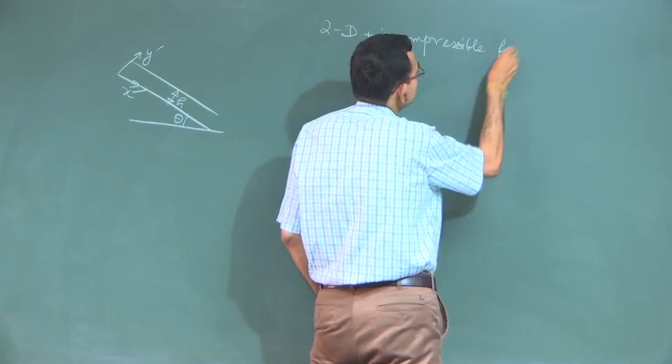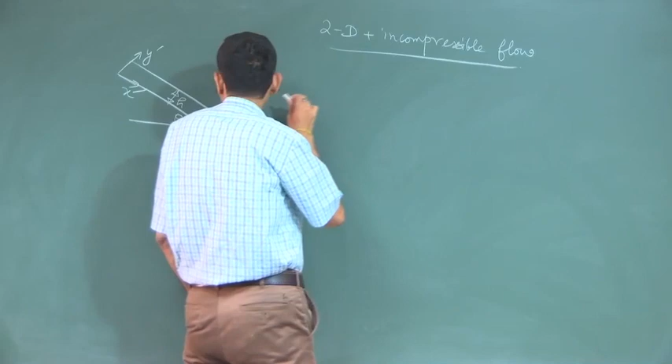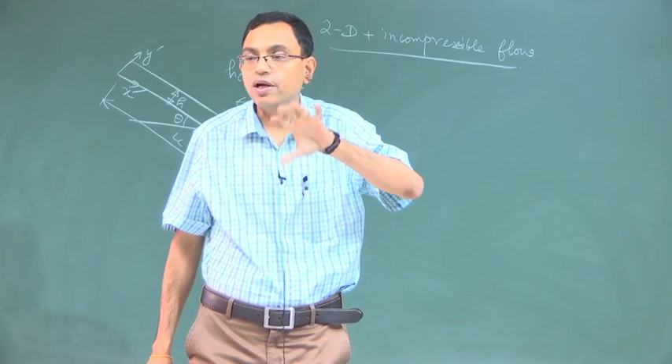What are the governing equations? After considering that the characteristic H naught is much less than LC, so that epsilon, which is H naught by LC, is much less than 1. With this consideration, and of course with the consideration that the product of epsilon square and Reynolds number is not large. So, Reynolds number is not abnormally large such that even if epsilon is small, Reynolds number into epsilon square is large. That situation we are ruling out.

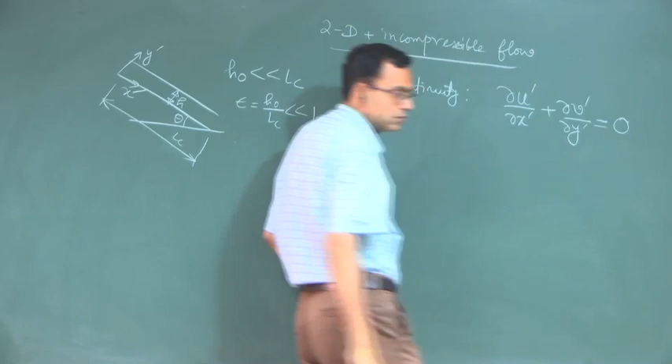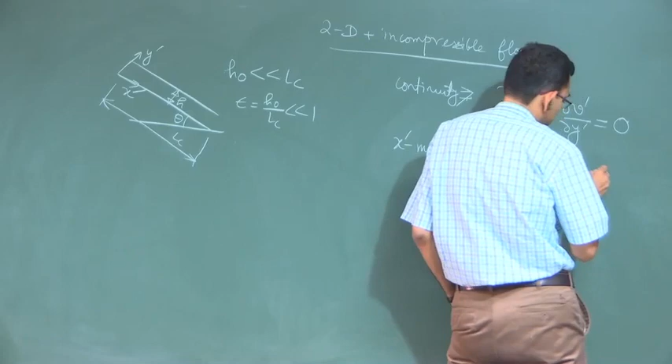Our hope is that even if the Reynolds number is moderately large, epsilon is so small that epsilon square is limitingly small and epsilon square multiplied by Reynolds number will be negligible. That is our intuitive hope. So, with that, the continuity equation will always be important. These are the momentum equations.

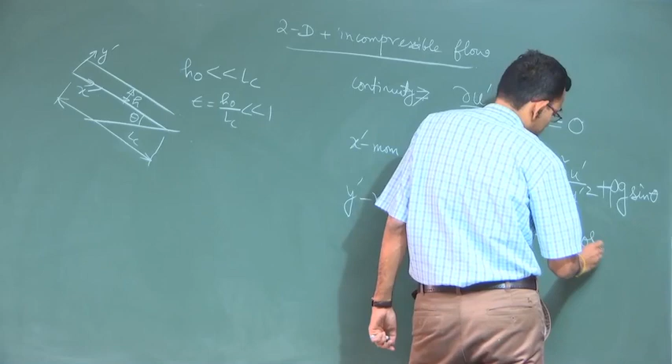So, this mu del square V term itself is not there. So, you can see a very interesting thing: along the y direction, which is across the film thickness, the pressure variation is like a hydrostatic pressure variation, purely gravity driven. Okay. So, we have given detailed considerations of how different terms are dropped so that these simplified equations are arrived at. I am not going to repeat that in this lecture anymore.

Now, we should concentrate more on what we require so that we can solve these equations. Out of these equations we really do not know U, V, P. We also do not know another thing which is hidden in this equation, because everything is expressed in terms of film thickness, but film thickness is not given to us a priori. So, H, the dimensional H, say H prime, is also not known.

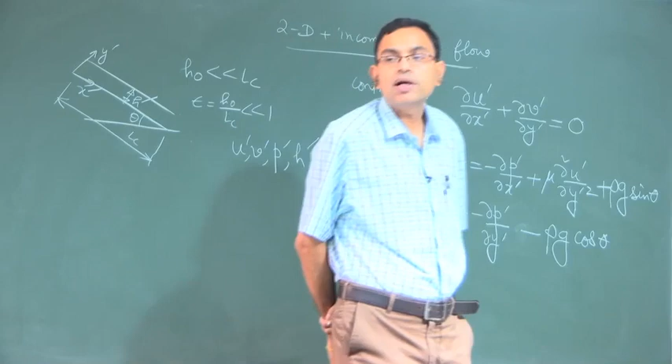The thin film problem that we discussed as a special problem in the context of exact solutions of the Navier-Stokes equation differs from the generalized thin film theory in that there this was taken as a constant, no more a variable for the problem, but now this is a variable. So, you require enough boundary conditions to solve this problem. What are the boundary conditions that you must consider?

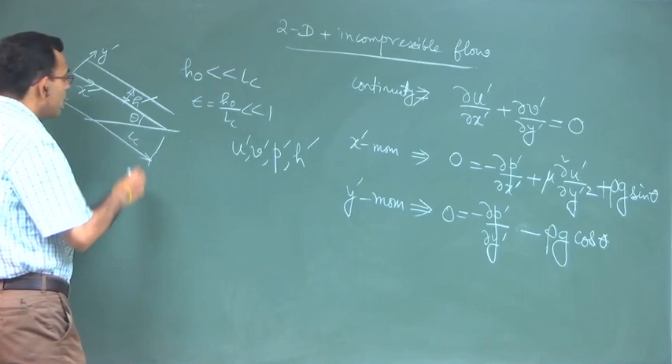First of all, we will consider the boundary conditions at the interface. To highlight that this is not flat, let us draw it like this, so that you never keep the prejudice in mind that it is flat. Under certain conditions it may be treatable as flat, but in general not. So, what are the boundary conditions at the interface? That is the first question we would like to answer.

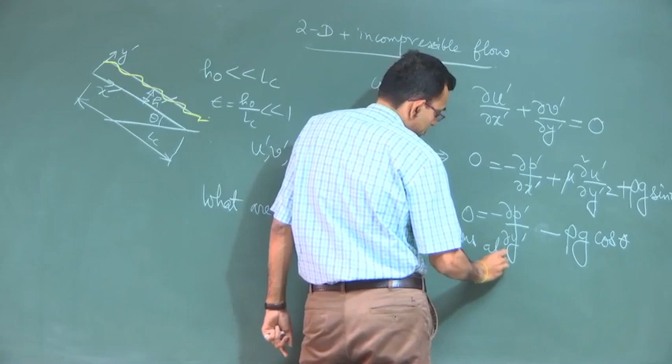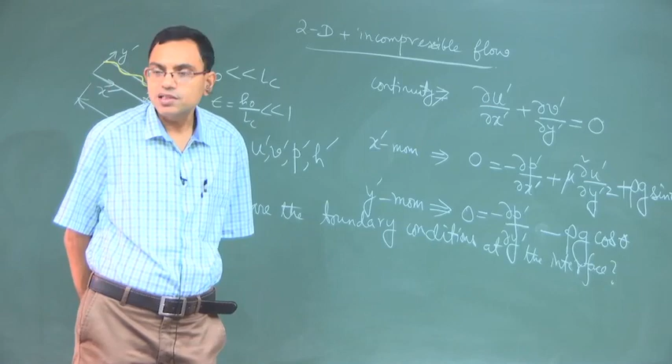The boundary conditions at the interface are typically as follows. One type refers to force balance at the interface, and therefore they are kinetic in nature. Another boundary condition purely follows from kinematic constraints, and that is called the kinematic boundary condition. We will start with the force balance boundary conditions and then arrive at the kinematic boundary condition.

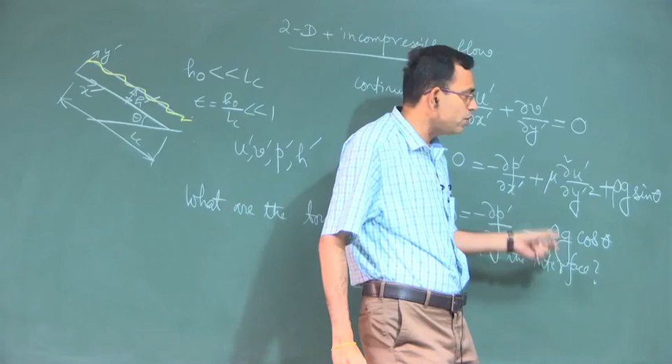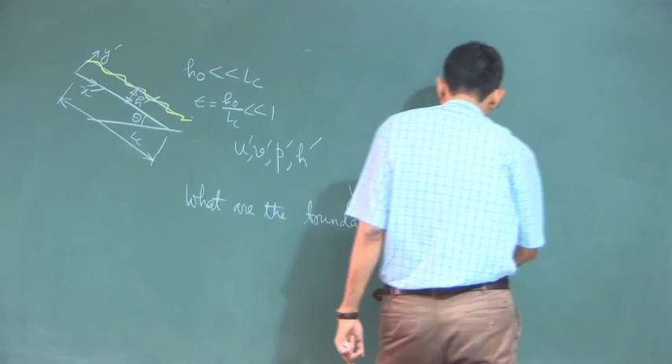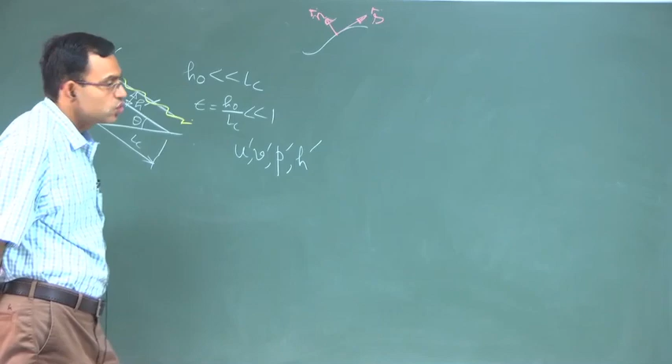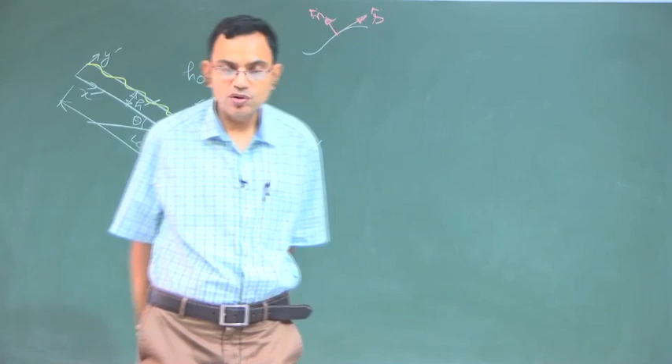I am erasing these equations; we will come back to them when we non-dimensionalize the governing equations. When you have an interface like this, the two important directions for the interface are, in terms of curvilinear coordinates, the s and n directions. We will write one force balance along the s direction and another along the n direction. Along the s direction, we call it tangential force balance.

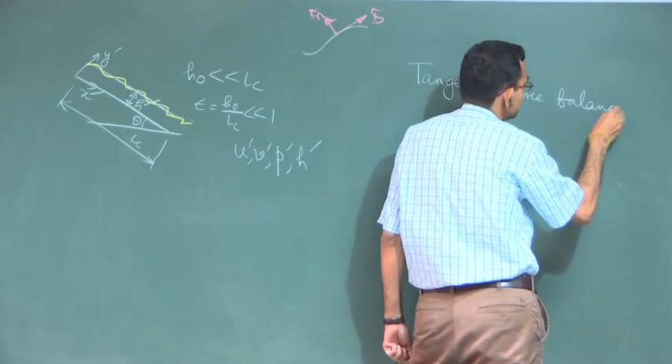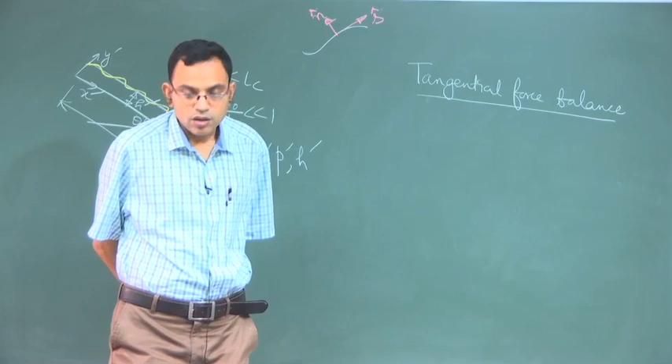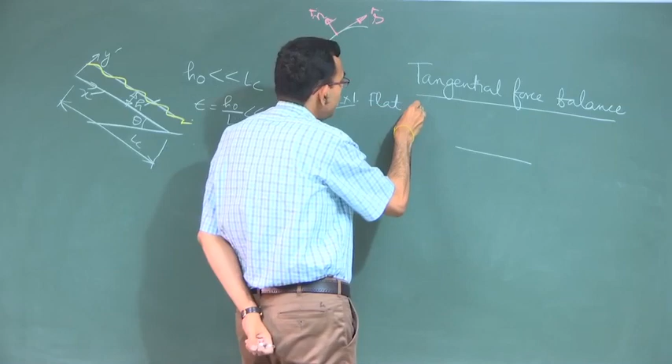So, how to write a tangential force balance boundary condition? To understand it clearly, we will consider a flat interface first. Example 1, flat interface, and then we will extend it to a curved interface. For a flat interface, let us say this is an interface. This is like an edge view of the interface. In reality, it is something like a flat membrane, so to say.

So, now let us say that we have a force balance at the interface. On this side there is gas, or I mean a phase which is having much less viscosity and density as compared to what is there on the bottom side, that is our assumption. So, if that be the case, we are not really bothered about what is there on the top side, and on the bottom side there is some liquid.

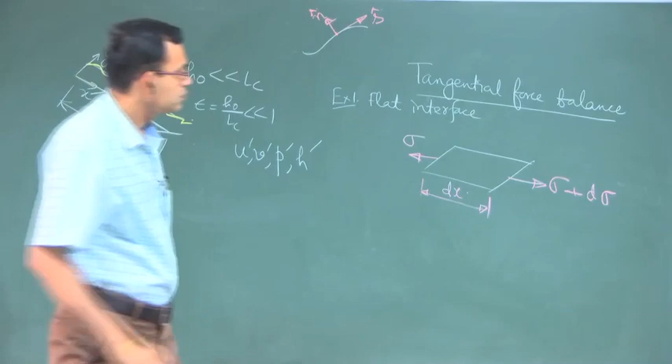So, now at the interface there can be a variation of temperature along the tangential direction. If there is a variation of temperature or composition along the tangential direction, there will be a variation in the surface tension force, because surface tension is a strong function of temperature and composition. So, if the surface tension here is sigma, and if this length is dx, here this is sigma plus d sigma. Let us say the width is 1, this dimension is 1. So, sigma into 1, this is sigma plus d sigma into 1.

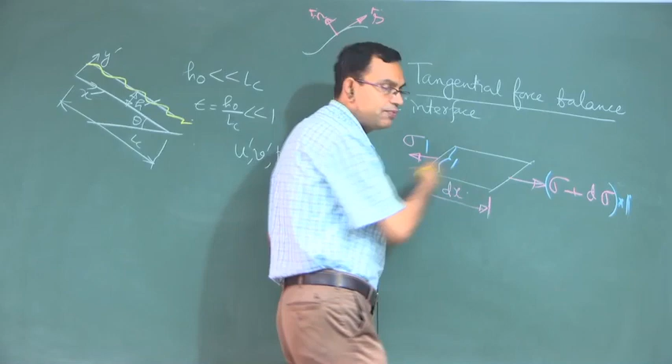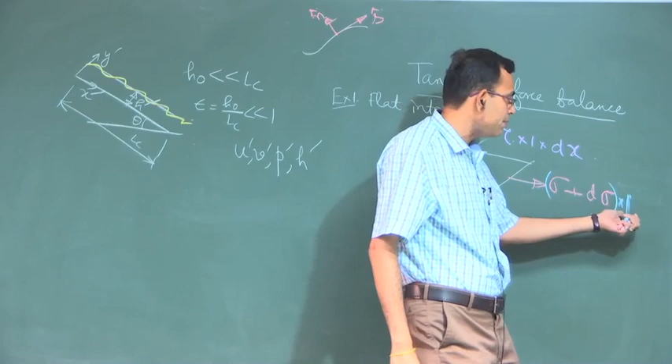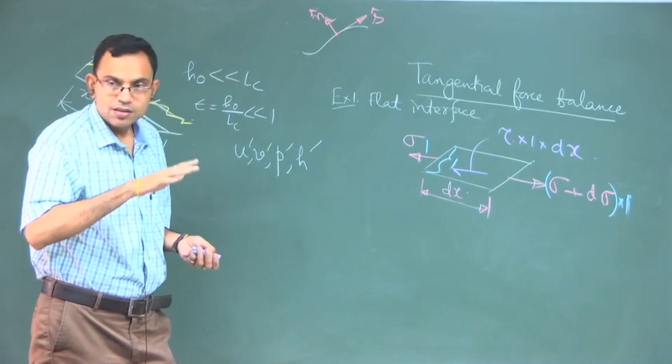The other force which is acting on the free surface is the shear stress, tau. So, the tau is tau into 1 into dx. Remember, surface tension is force per unit length, so that is multiplied by length. Shear stress is force per unit area, so that is multiplied by area. So, this is the free body diagram of this elemental membrane at the surface. This is a fluid membrane, not a solid membrane.

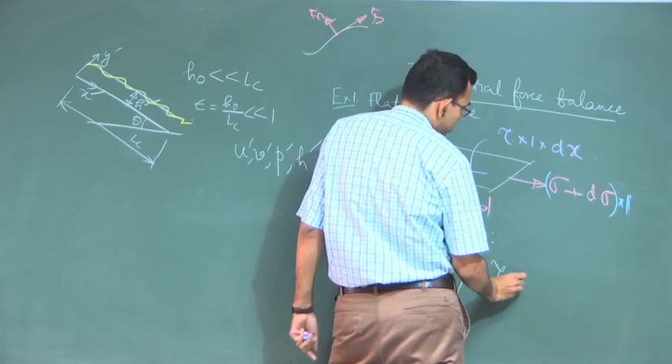So, for equilibrium, you have resultant force along the x direction equal to 0. So, minus sigma plus sigma plus d sigma minus tau dx is equal to 0. So, tau becomes d sigma dx. So, this is for a flat interface.

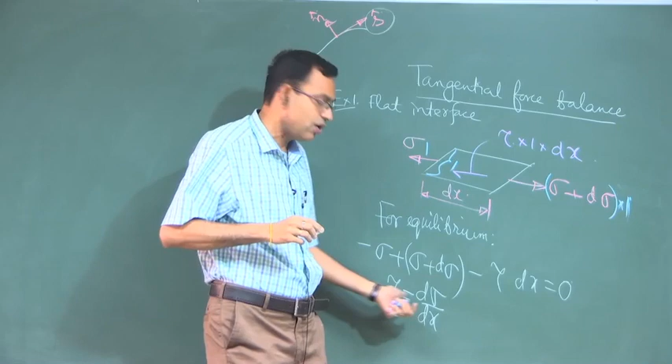Now, the sanctity of the x direction gets completely lost if the interface is undulated. Then what matters is the local tangential and the local normal direction. So, instead of writing the tau along x, we should have a resolved component of tau along s. So, how do you resolve the tau? Remember the relationship between the traction vector and the stress tensor. This tau is nothing but a component of the stresses coming from the stress tensor along the x direction. So, first of all, what is the traction vector?

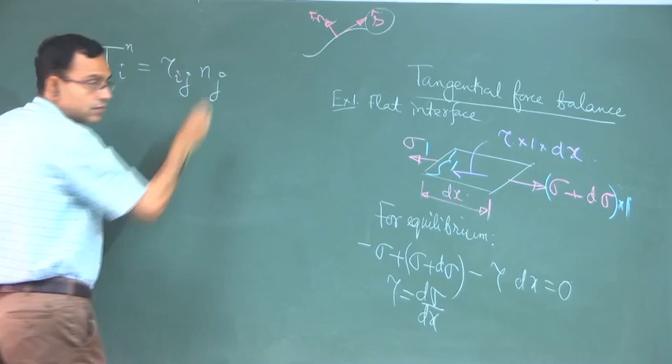Let me write it in index form. i equal to 1 means x, i equal to 2 means y, i equal to 3 means z. It is a 2 dimensional problem, so only i equal to 1 along x and i equal to 2 along y. So, you can get the components of T, and then constitute this vector, for which i equal to 1 is the x component and i equal to 2 is the y component. So, the resultant will be this vector.

So, now this vector will have a component along the s direction if the surface is undulated. So, the left hand side is a little bit more straightforward than the right hand side. On the right hand side, instead of finding the derivative of sigma along x, you need to find out how sigma varies along the s direction.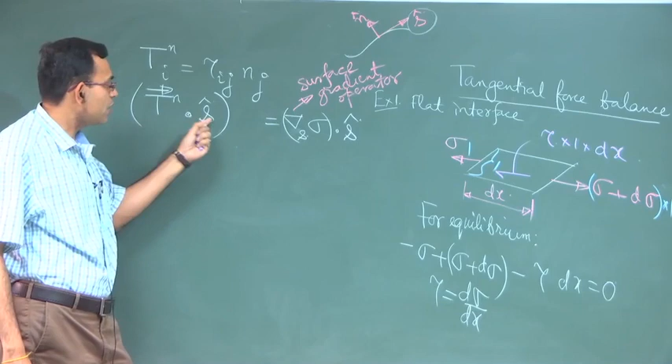So, just from a vector calculus angle, when you write different terms, make sure that the terms in the left hand side and right hand side are consistent. So, see, this is a vector, this is a vector, dot product of the vectors is a scalar. This is a sort of a gradient operator, not really the traditional gradient operator, but surface gradient operator, but a gradient operator operating on a scalar will make it a vector. So, this is a vector, dot product with a vector will also make it a scalar. Okay.

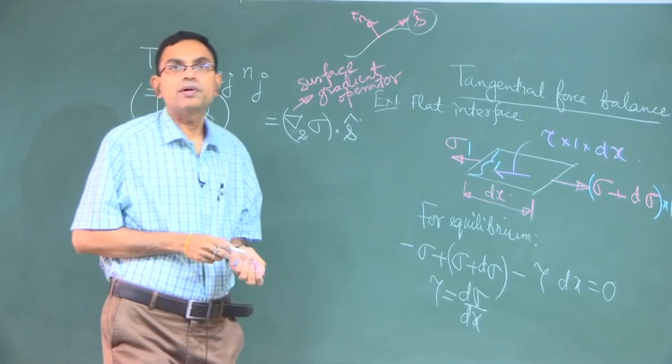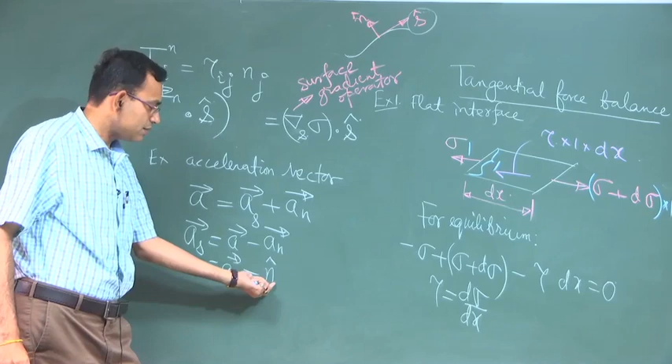So, now the question is, what is the surface gradient operator? To understand that, we will take an example of acceleration vector. So, acceleration as a vector is a vector sum of the s component of acceleration and n component of acceleration. So, as is a minus an. So, what is n? N will have a unit vector in the direction of n. So, this is the vector marker for n and its scalar component is nothing but this one, right.

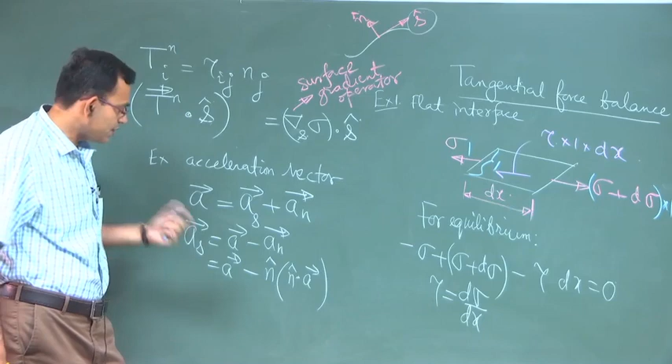So, in this way you can write grad s, right. Do not take it as a derivation. It is not that I am deriving this operator like this, but it is an analogy, that it is like the component of grad along S, just like component of any vector along S. So, philosophically it is similar, but of course, this is just an algebraic quantity and this is a vector operator. So, they are not exactly the same.

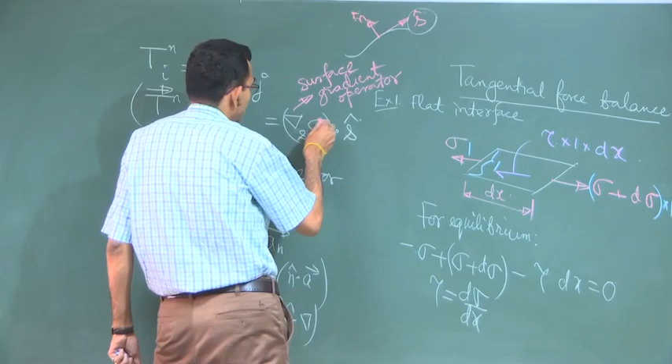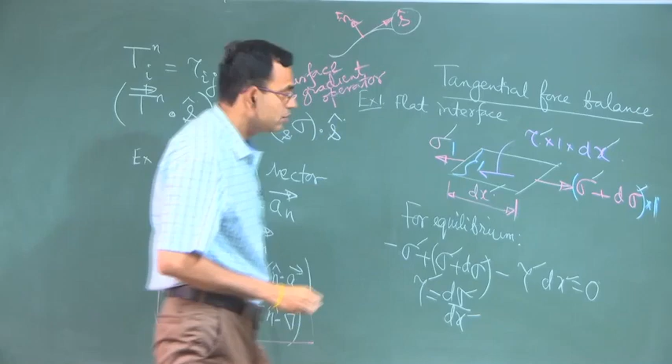So, we have defined grad S sigma through this expression, and this in a way defines the tangential force balance. So, now what we will do is, not generalize, but we will write it for a dimensional form first. Because we were talking about the dimensional variables x and y, we will write dash at the top of all the terms, just to be consistent with our symbol in this particular chapter. Dash means all dimensional quantities. So, these are dash dash.

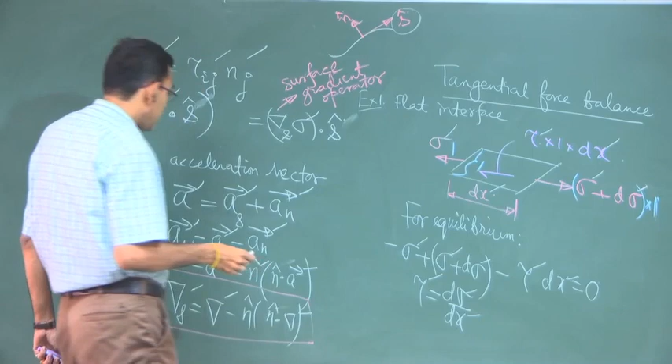N and S we should not put dash, because N and S and N dash and S dash are all the same. So, S and N we can write without dash, but others we should write with dash, right. I think I have done that. So, we have mentioned the tangential force balance. Then we will consider a normal force balance.

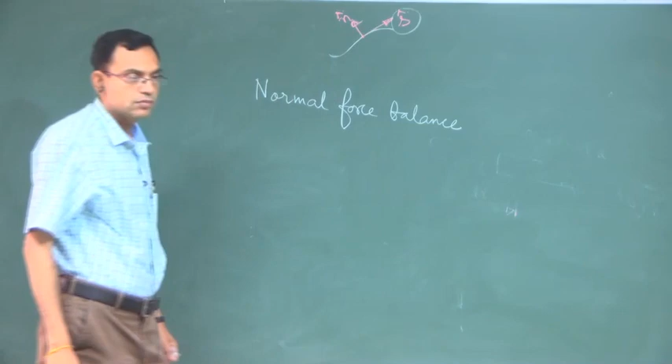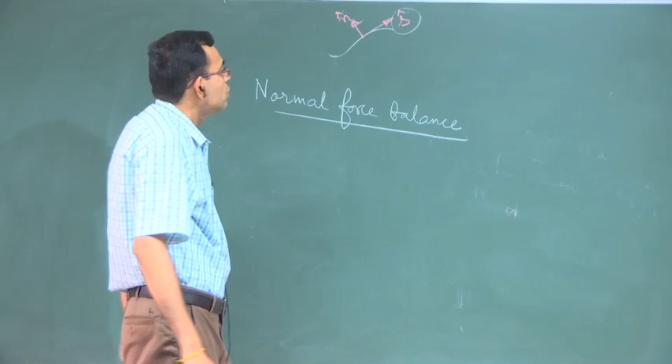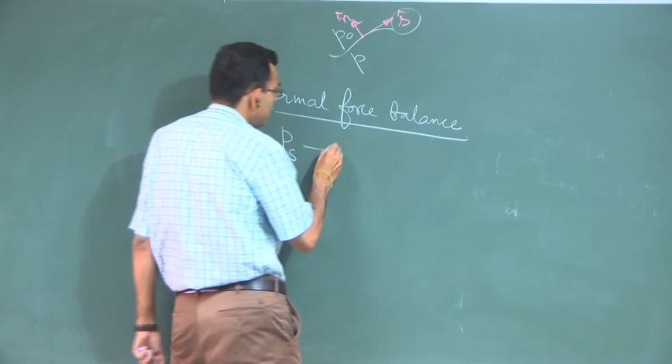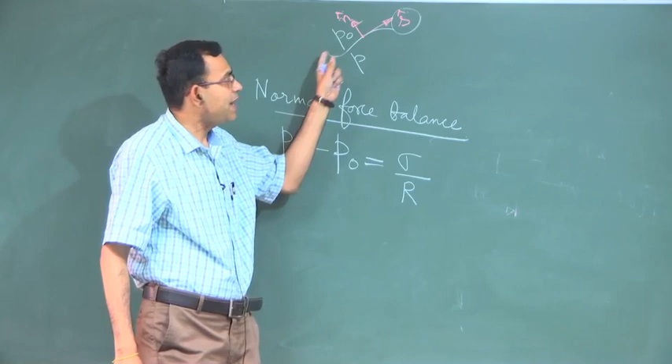Imagine that the interface is in static equilibrium, where on this side pressure is P naught and on this side pressure is P. So, you can write the pressure P at the surface, which we call as Ps, minus P naught is equal to sigma by r, where r is the radius of curvature of the interface. It is a planar problem, so R1, R2 all those things do not come. So, this is basically the Laplace pressure. This is the surface tension locally and this is the radius of curvature of the interface locally. So, we should give dash also to all these terms.

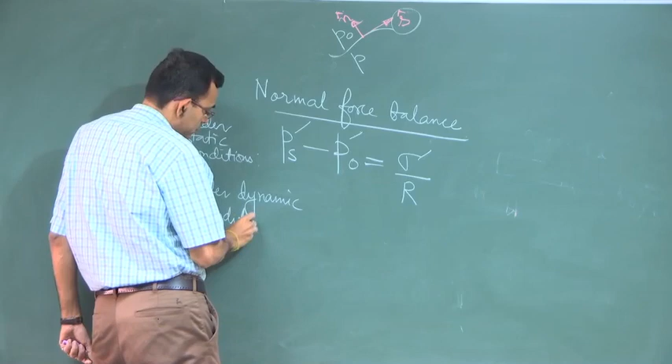Question is, is this same equation valid under dynamic conditions? The answer is no, in general not. Why? Under dynamic conditions there is also a viscous normal stress in addition to pressure. So, we should clearly write under static condition. Under dynamic conditions you have to augment this with viscous normal stress.

So, how do you find out the viscous normal stress? The traction vector dot with n; the tangential component was dot with s, this is dot with n. And why are we putting a minus sign here? Because pressure by definition is compressive, whereas this by definition its positivity is tensile.

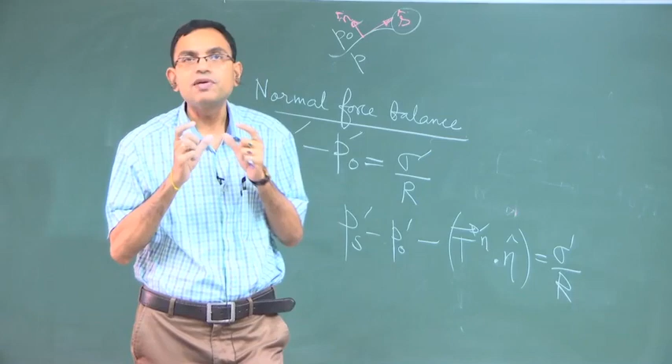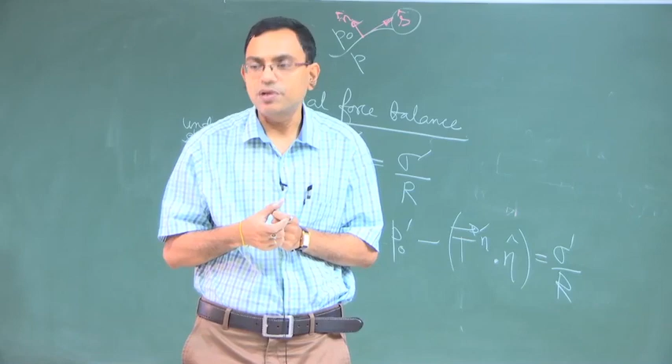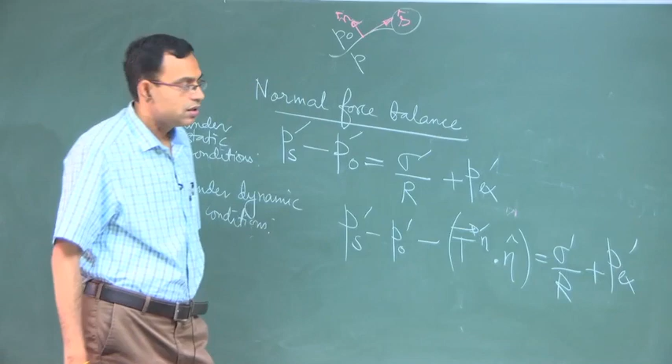Now, this is not all. Why? Because of a very interesting physical phenomenon. When the film thickness becomes smaller and smaller, there is a critical film thickness when the van der Waals forces start becoming important. The equivalent van der Waals forces, represented in a pseudo continuum type of framework, are represented by an augmented pressure called disjoining pressure, or excess pressure. We will consider that it is there even under static condition. So, we will have an additional term which we call the excess pressure or disjoining pressure.

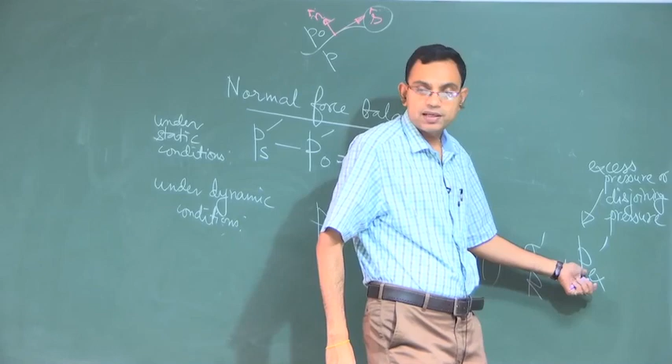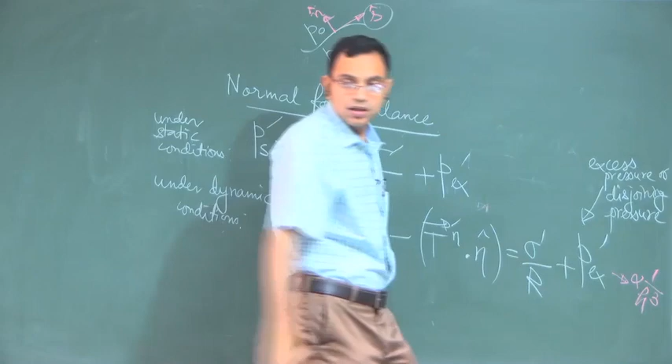And typically this is not a constant because it is a function of the local film thickness. It depends on the kind of situation, but typically it will scale with 1 by h cube. So, if the film thickness is smaller and smaller, this will become so large that it may overweigh all other terms in this equation.

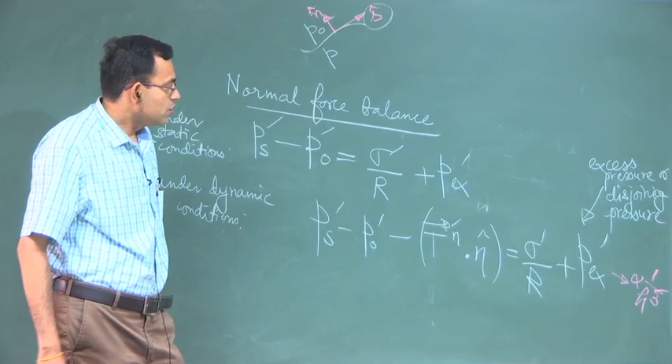So, to summarize, in this lecture we have discussed the force balance boundary conditions at the interface, normal force balance and tangential force balance. What we have not touched upon till now is what would be the kinematic condition at the interface, and that we will take up in the next lecture.